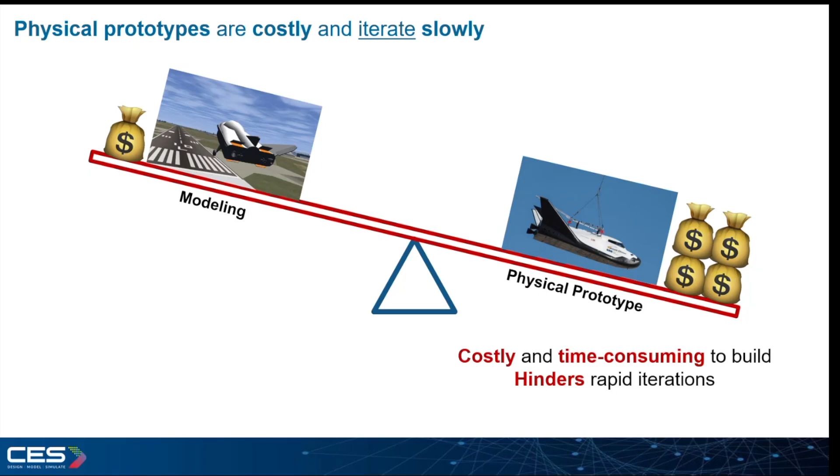Speaking about these common challenges, one I hear frequently from our customers is the reliance on physical prototypes. While physical prototypes are important in building systems and missions, they are expensive and time-consuming to build. As a result, teams often have limited time to evaluate design alternatives and iterate quickly over different scenarios and conditions.

By shifting the development to the left, which means modeling in this case, engineers can explore a much larger design space, evaluating alternative solutions earlier and continuously improving the design before committing to physical prototyping.

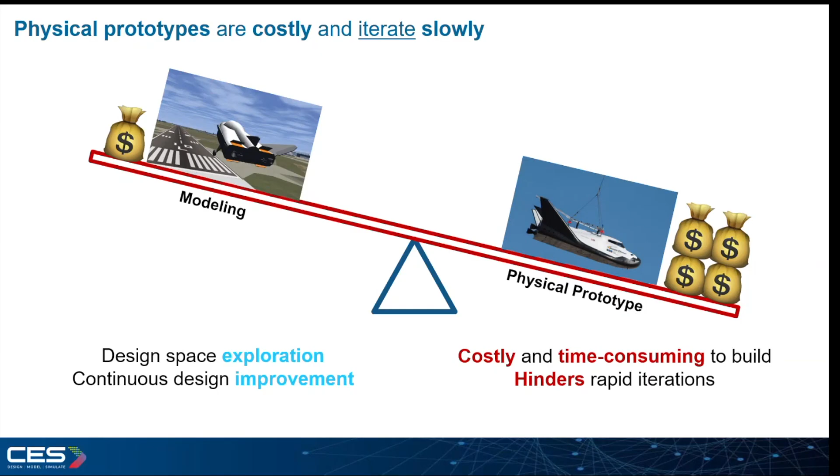Another challenge that engineering teams are facing is keeping development artifacts connected as the project progresses. A requirement influences the system architecture, which drives the design, the implementation, and the system integration. And as everybody is aware, these phases depend on each other. Every stage at least depends on the previous one.

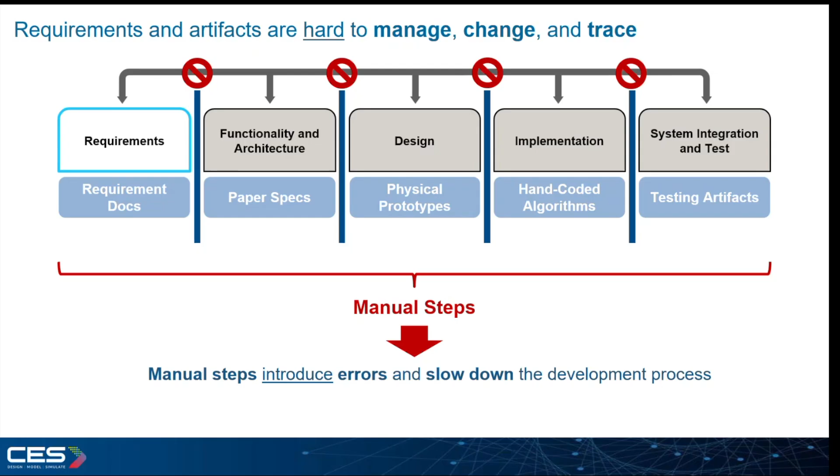In many organizations, this transition relies on handoffs and disconnected documents. As a result, changes become difficult to manage. Traceability is lost, and errors are introduced in the development process because of the manual steps involved in different phases. This challenge, related to requirements and artifacts, introduces errors and slows down the development process. This is exactly a type of challenge that model-based design can help overcome.

In this process, errors are often discovered late. As you make progress, it becomes more costly to fix issues and more time consuming. As a consequence, cost runs over the budget and the project encounters delays. These challenges can be overcome using model-based design, which starts with the requirement all the way to system integration and testing.

So the solution for us to explore today is the model-based design approach with MATLAB and Simulink. I would like to give you an introduction to model-based design before we apply it with MATLAB and Simulink to a use case, which is building a quadcopter system that's going to be our demo, just to remind you that we will have a live demo at the end of the session.

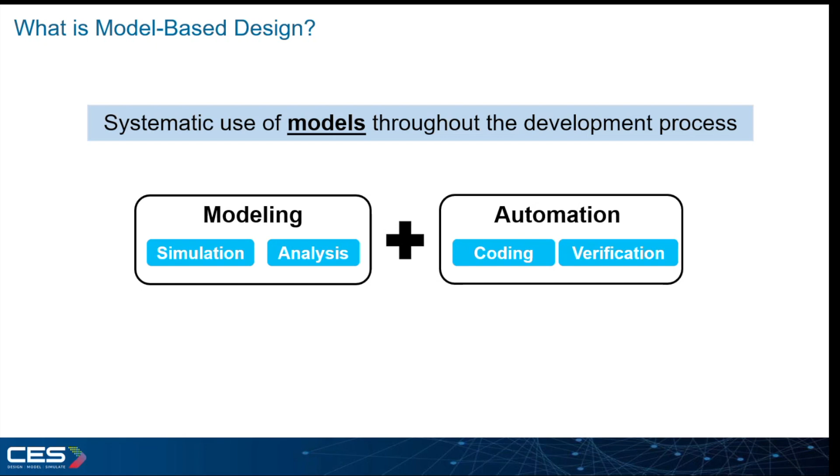We describe model-based design as the systematic use of models throughout the development process. There are two major components: modeling and automation. Modeling with simulation and analysis to try out new ideas and give you fast, repeatable testing.

So we have this question, why model-based design, that we would like to answer by the end of this section. Modeling and simulation helps cut cost and speed up design iteration, and I believe it's quite clear to everybody that modeling is not as costly as physical prototyping. By modeling, we mean the simulation and analysis. We model a system so that we can simulate and iterate over different conditions through what we call the analysis of the system.

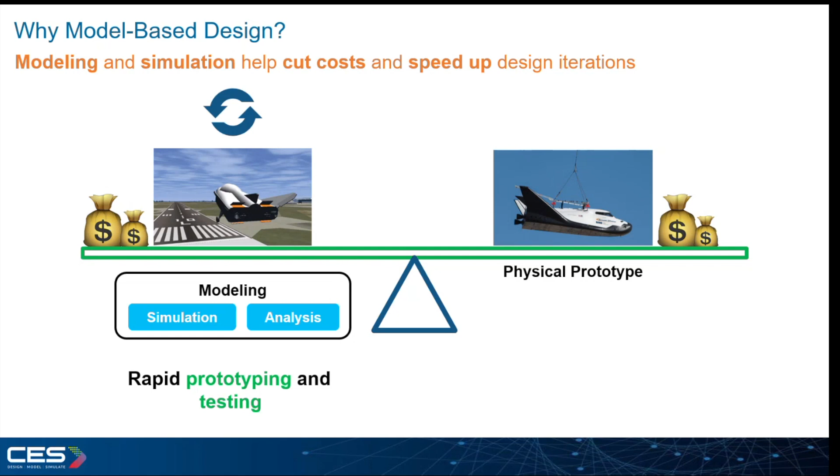Also, modeling enables iterations. So we can iterate over different scenarios, conditions, parameters, and so on. With that, we can do rapid prototyping and testing within less time and with less cost.

With model-based design, multi-domain models serve as the source of your design throughout all the phases of development, so that you can eliminate the barriers. Remember the barriers that we saw before. With model-based design, you can eliminate this, allowing you to capture requirements and link them to artifacts so that you can do traceability throughout the development process.

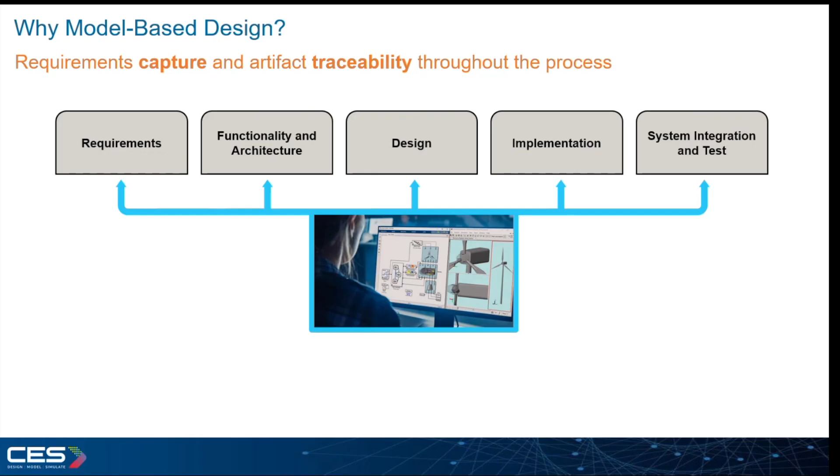And remember that model-based design is all about a model or models.

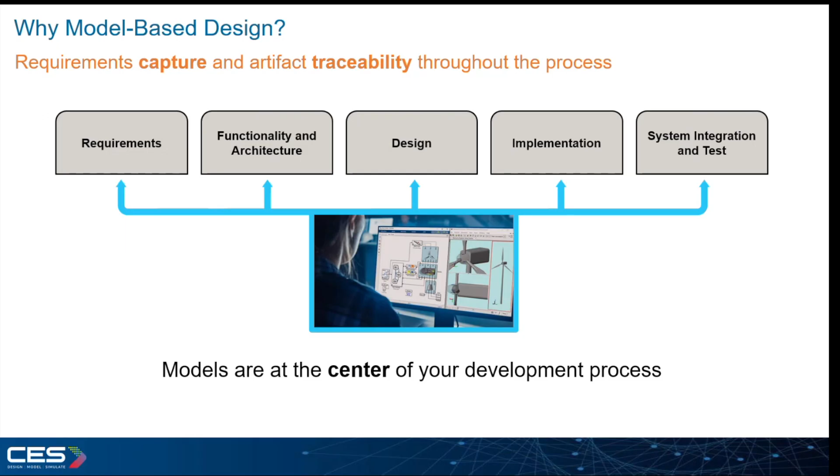Another answer to our question, why model-based design, could be automating steps in the design process. For example, coding is usually manual, and verification is disconnected. Engineers usually test at the end of the process while they do system integration.

With model-based design, you can capture requirements, specify system behavior and architecture, perform simulation, and provide a foundation for automation. You can also automatically generate code from your model for the implementation and for verification as well. So let's look at the verification here.

There are different ways to do verification. As you get your requirements in the MATLAB and Simulink environment, you can perform what we call requirement-based testing at the requirement level. We are not talking here about the architecture, design, implementation, or even system integration phase — you can analyze and verify your requirements early.

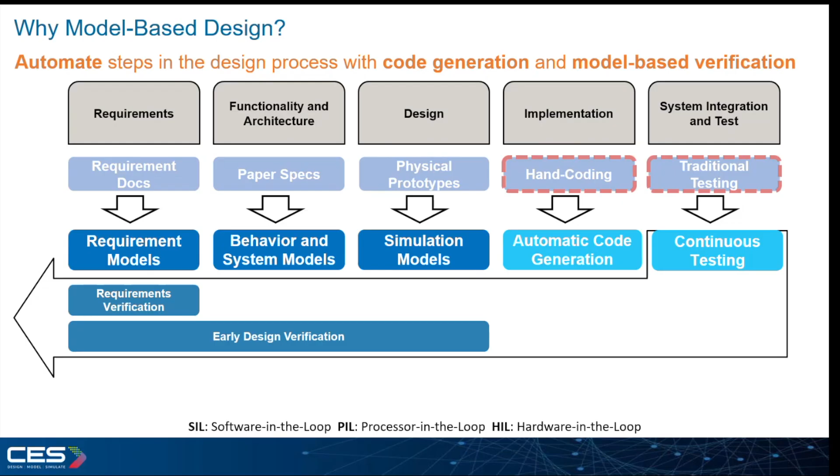Then, as you progress with building the behavior of the design or your system, you can perform early design verification. Some people like to call it model in the loop.

Virtual integration and testing is based on code generation. You first generate code, and then you can run it on your target hardware, or on a kind of hardware that will help you verify your system design.

We have three different ways to do that: software in the loop, processor in the loop, and hardware in the loop. The last verification step could be physical system testing, where you deploy your code to your target hardware, integrate that processor or FPGA into the bigger system, and start doing physical testing on your system.

With that, you eliminate any errors, and you can also save time, because this automatic code generation and automated testing will help you cut not only the cost but the development time as well.

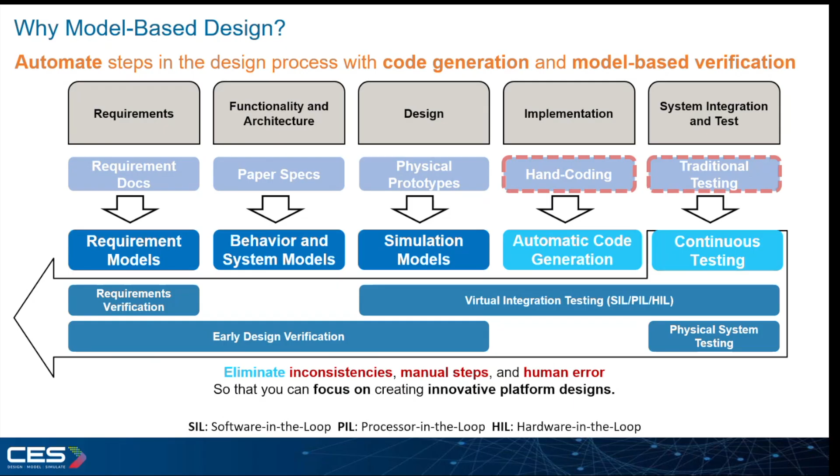The purpose of this is to focus on creating innovative platform designs, and that includes not only the design of the plants, but also the algorithms. Usually people are more focused on improving these algorithms, and that's one way to focus on the algorithms and the design of your platform throughout the model-based design approach.

Summary: modeling and simulation enables short and quick iteration cycles, saves time and costs, and ensures the delivery of products with minimal defects and, of course, high quality deliverables.

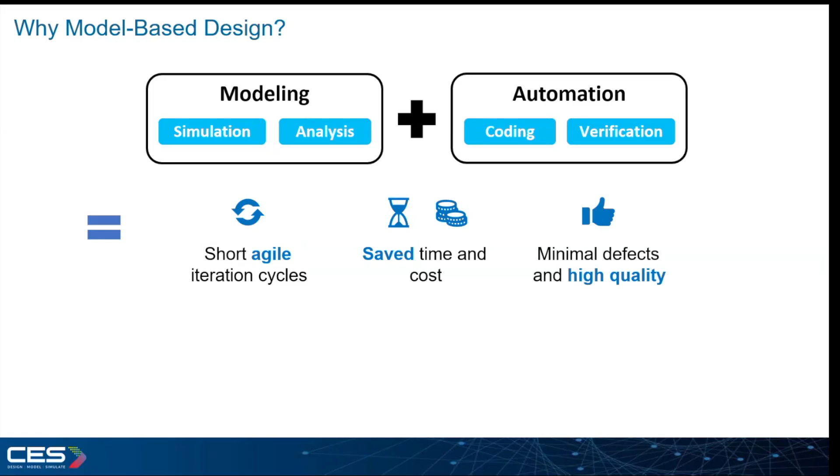At this point, we can now answer the question, why model-based design? I would say the answer is now very clear: it's to accelerate mission-critical platform development through connected digital models, early simulation, continuous testing and validation, and of course, bringing teams together to work on the projects using such an approach.

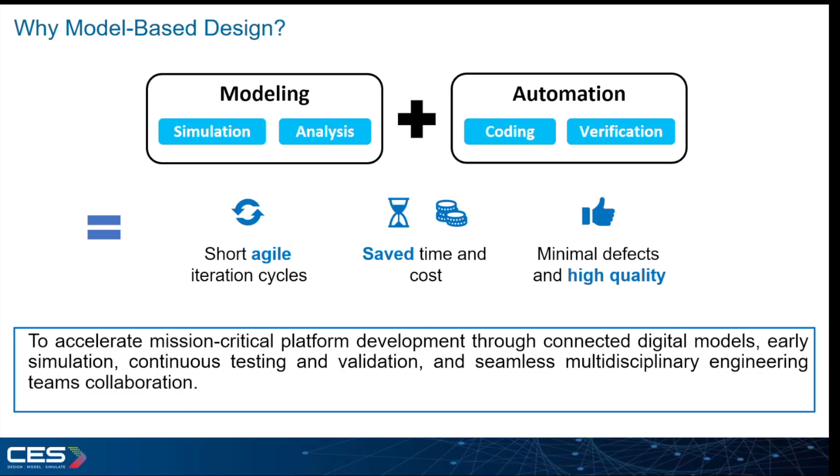So maybe now you have a question: should you apply model-based design as it is, or is it fine to go with a piece of it instead of going with the entire workflow? The answer is, model-based design is not all or nothing. We have what we call the model-based design adoption grid for that.

We help our customers in the region understand where they are now and where they want to move. Usually most people start with modeling their design algorithms when they get started. Then some of them move to verification, to simulation verification of their systems, and many of them are generating code from the model so they can perform rapid prototyping and embedded code generation.

Once this grid matures enough, you can do both of these steps. You can do modeling and simulation, or you can go from the left to the right and perform code generation. With that, you can start performing hardware-in-the-loop simulation, real-time testing, so you understand how the system performs when running on a specific target. You can also perform software-in-the-loop and processor-in-the-loop as another verification layer before you move to the certification of your products.

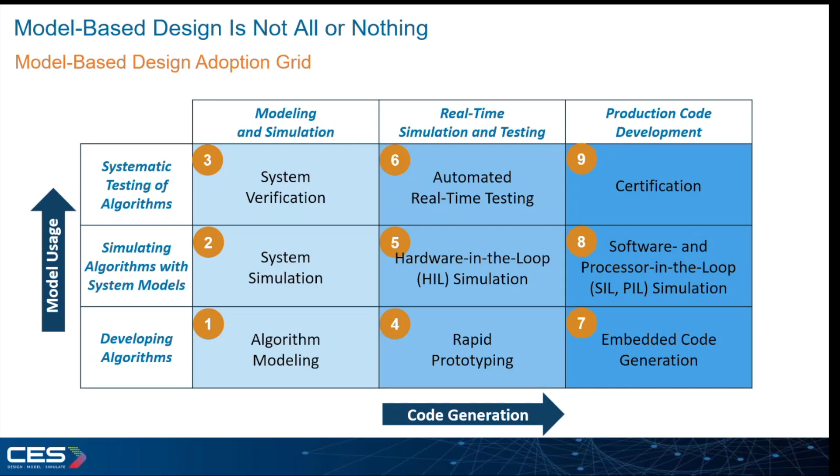Broadly speaking, as I stated before, model-based design can be described as the systematic use of models throughout the development process. I want you to remember this flow chart: we start with the requirement, then functionality and architecture, design, implementation, and finally system integration and test. This is not a one-directional approach, but an iterative approach.

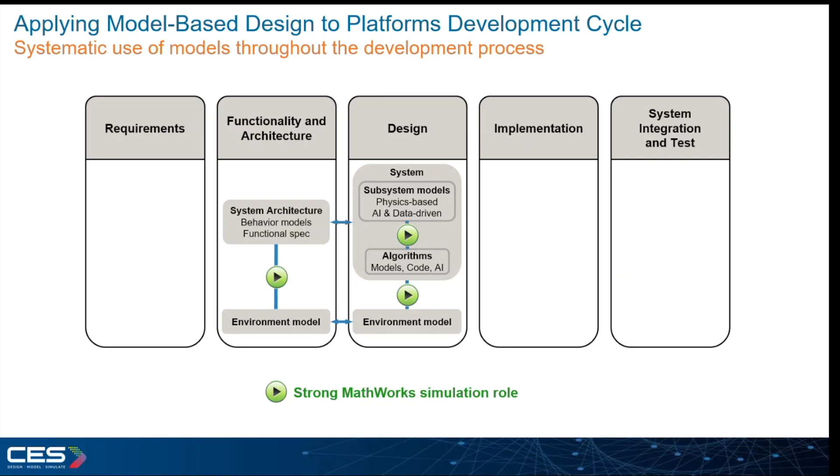So the design comes with the architecture usually, and the system architecture describes the behavior model or can be a functional architecture based on the requirements. And MathWorks tools can help heavily with these two phases, and it has a strong simulation role.

In order for modeling and simulation to be effective, you need to be able to combine components and systems from multiple domains together. So these systems can be continuous time models, discrete time models, physical models, and so on and so forth. MATLAB and Simulink can help you with modeling these components and bring them together to build the system level simulation. For example, by modeling and simulating components that run either continuously, discretely, or even event-based systems.

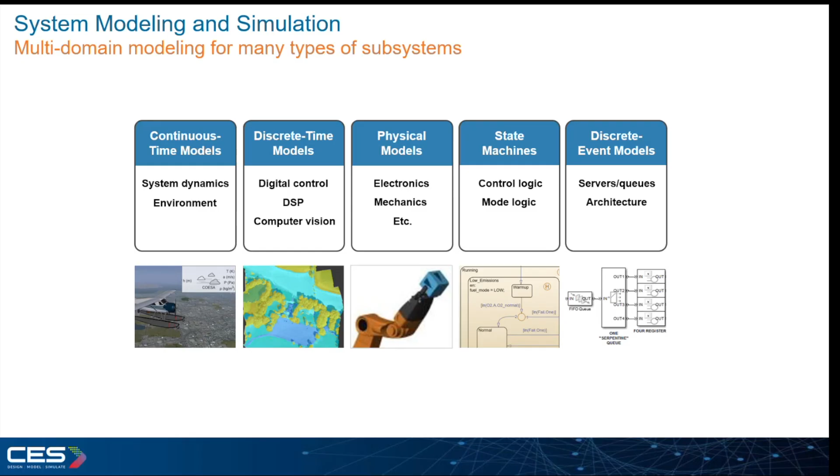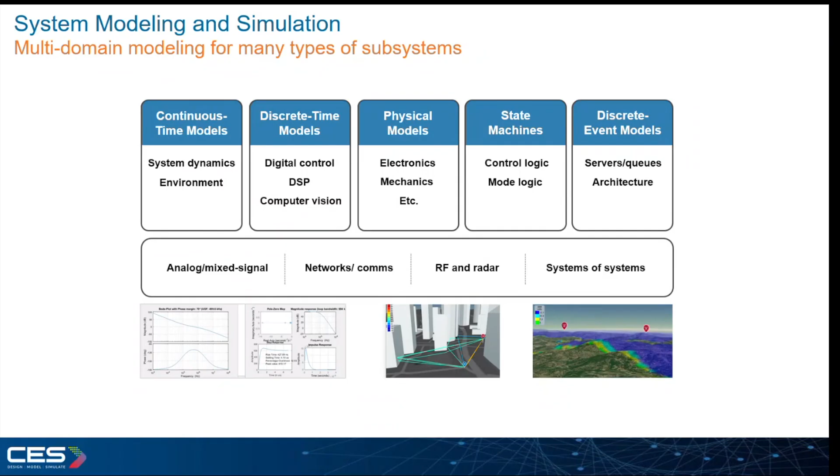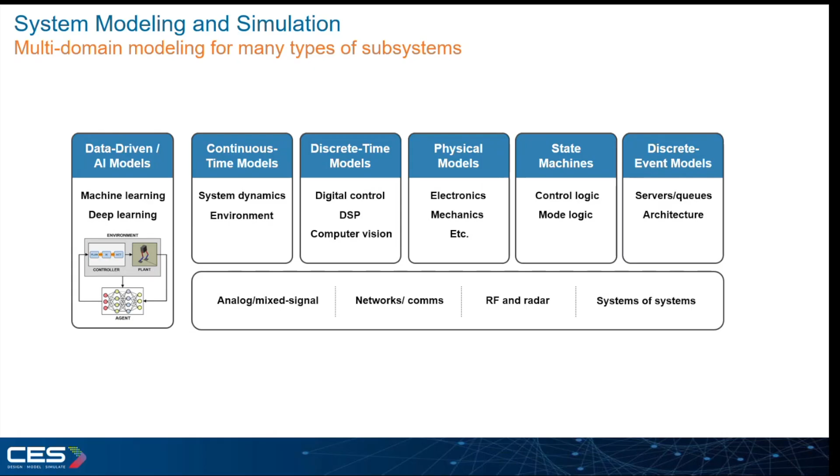And commonly we use them for system identification if we don't know the equations of that specific component which makes our system. So we can use AI, or what we call data-driven techniques, to build a component that will then be integrated into the system level simulation. And of course, you can create and integrate perception in autonomous systems. This is mainly related to the algorithmic part of the design. All of this can be done within MATLAB and Simulink.

So when we say MATLAB and Simulink, we don't mean two different platforms. It's a unified environment, and these two tools work together to help you with building such system of systems or even mission simulations.

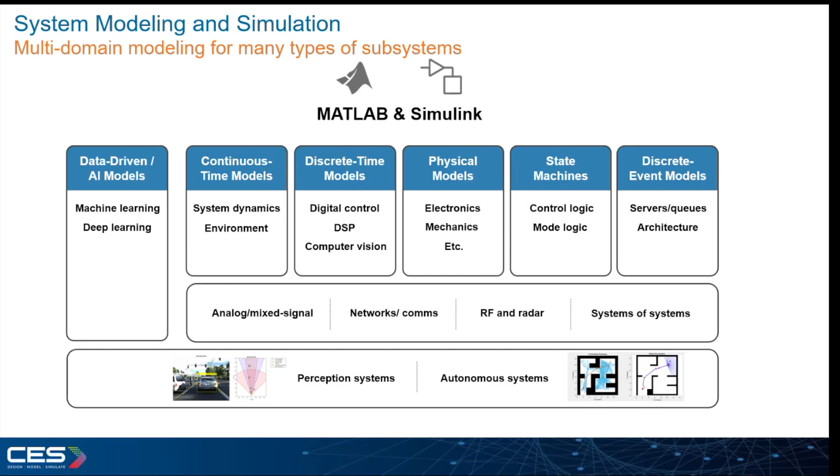These tools and languages can be integrated with MATLAB and Simulink in a number of different ways. And the reason why we want to integrate sometimes with external tools or third-party software and hardware is to get whatever we have created before. So say that you have C++ code that you created before, legacy code that you want to get into your Simulink environment. That's something called code integration. You bring it to MATLAB and Simulink, you integrate it into your simulation, you perform simulation, and later on you can even generate the code.

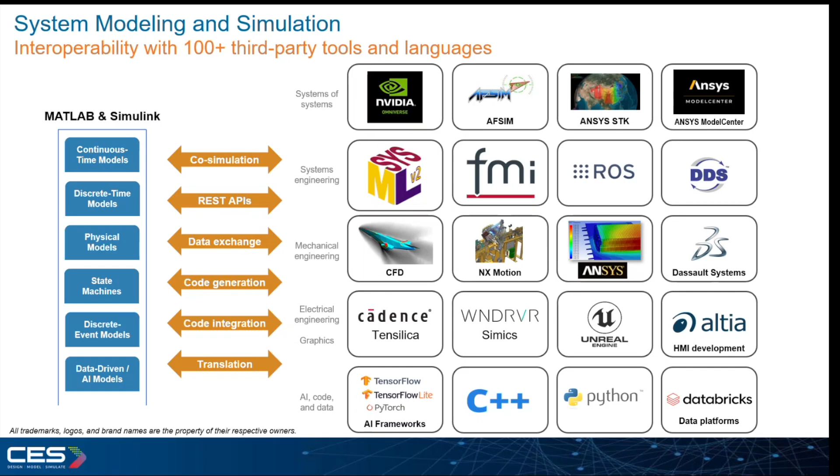So there are different ways to integrate Simulink with other third-party software and hardware. Specifically here we are talking about software, but we also integrate with different hardware seamlessly. So these ways can be co-simulation, data exchange, code generation, and so on and so forth.

Going back to our view of the system development lifecycle, this connection and integration of different types of models from an ecosystem of tools and languages that describe both the system functionality and architecture and the subsystem design form the first thread of the digital thread, where you can trace development of your system from one phase to the other. So again, the digital thread or the model is at the center of this approach, which is model-based design. This digital thread can be further extended to capture system requirements by importing or even authoring your requirements within MATLAB and Simulink.

So you have at the beginning some line of business requirements, a stakeholder coming to you with some requirements and needs. So with the MathWorks tools for requirements, you can import those requirements from an external tool, or you can use Requirements Toolbox to build your requirements within the MATLAB and Simulink environment. And in that case, it will be much easier for you to link and perform different testing based on those requirements.

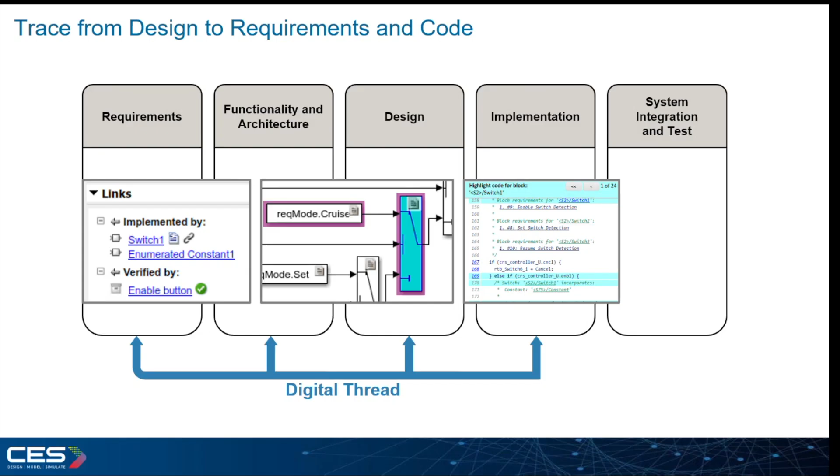And then, as I said, you can always trace your code back to the previous phases: the design, the architecture, and the requirements. So you generate code, and you would like to understand it, verify it. So one way is to trace it back to the design, then to the requirements. In that case, you might want to do some requirement changes, and it will be much easier with this model-based design approach to trace back to those requirements and see the changes reflected in the subsequent phases.

The testing, or the V&V and testing, is a very important aspect, and it's very well supported by MathWorks tools. There are other tools that can do testing, verification, and validation. But the good thing about this environment is that you can do these things automatically, or what we call automated testing, verification, and validation.

So, as I said before in one of the slides, you can perform testing, verification, and validation in different ways, starting with requirements validation, early design verification, virtual integration testing through what we call SIL, PIL, and hardware in the loop. And eventually you would like to test with your physical system, and that's called physical system testing.

Now, we would like to understand how AI can help with building a better platform and accelerating the development. Let me bring back this model-based design chart and speak about the integration of AI in model-based design. AI can solve tasks that are difficult to solve with conventional or traditional algorithms. For example, you can use AI to model specific components, as I stated before. Or you can use AI as an alternative to some algorithms.

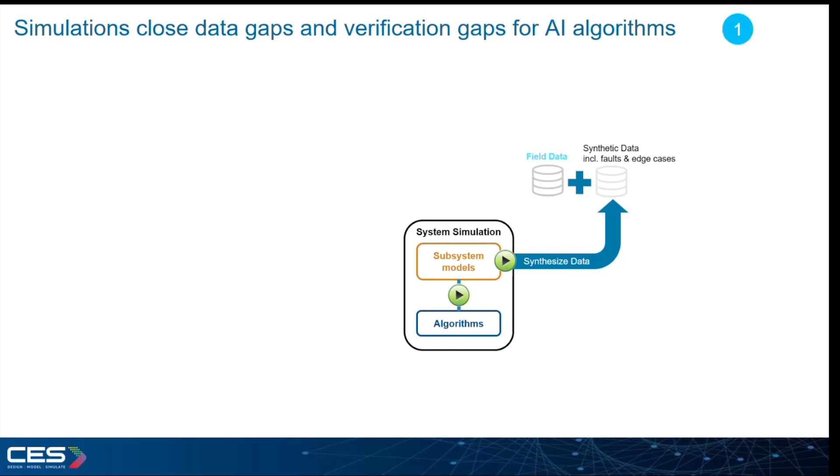Let's now look at how we can integrate AI into the model-based design. First of all, developing AI models requires a lot of high-quality training data. So with simulation models, you can generate synthetic data to add some fidelity to your real-world data or to improve your real-world data. AI models become more accurate when you train them with datasets that cover a range of operating conditions and scenarios, including specific cases that are very difficult to cover with real-world data.

So with that synthetic data, we can refine our model, improve it, and then verify the accuracy of the training. And this is like a loop, okay? So you can keep iterating over the training phase of your AI model until you get an accurate AI model.

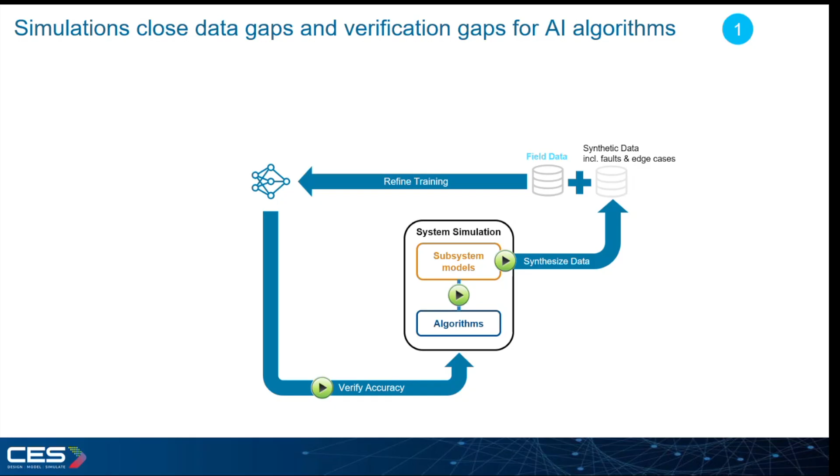These models, you don't need to build them from scratch. If you have something that you have built already, you can bring it to the MATLAB and Simulink environment. So say you have a pre-trained model. With the integration aspects in mind, we can bring these pre-trained models to MATLAB and Simulink and integrate them into the system-level simulation.

The same applies for common frameworks used by AI engineers, or machine learning and deep learning specialists. They use PyTorch and TensorFlow. So with the integration support packages provided by MathWorks, you can import from these frameworks to MATLAB and Simulink.

Or the other way, which is training an advanced model from scratch with MATLAB and Simulink, and we have some very powerful capabilities included under Deep Learning Toolbox and Statistics and Machine Learning Toolbox that help you with building AI models and seamlessly integrating them into your training loop.

There are two main ways of integrating AI. So I mentioned that we can use them for the platform design, or we can use them as part of the algorithmic aspects. So with that in mind, we would like to understand further how they can be integrated.

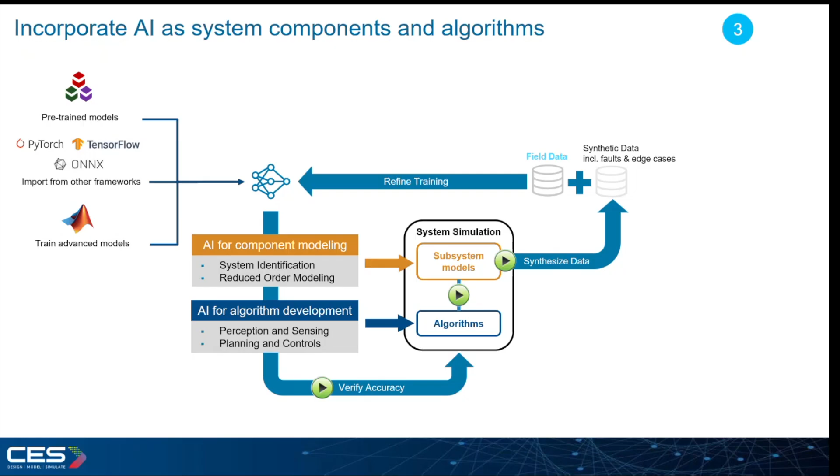So first, AI can be applied to component modeling. In such case, two use cases are very common: system identification and reduced order modeling. AI can also be applied to algorithm development, so you can add advanced perception and sensing capabilities to your algorithms, or you can also use that as a controller or as an algorithm for planning. So with that, you enhance traditional techniques with the integration of AI capabilities into your system design and into the algorithm development.

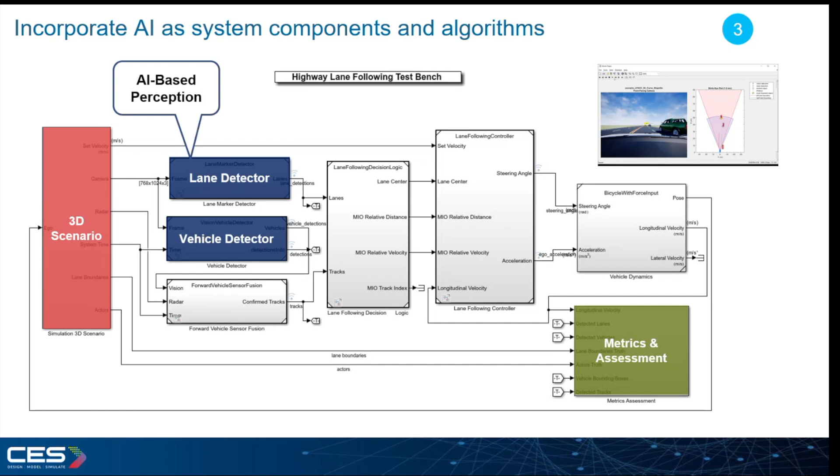This is a good example that shows how to use AI with model-based design within Simulink. So AI can be applied to solve the perception problem, can be used to create virtual sensors like sensor fusion. AI can play a crucial role in modeling system dynamics. And of course, we can build AI-based controllers.

So instead of using a basic, or let's say a controller that is not very accurate, we can train some deep learning model or even just a machine learning model, and we replace our controller with that AI-powered controller. Of course, you can use AI as an alternative to decision logic.

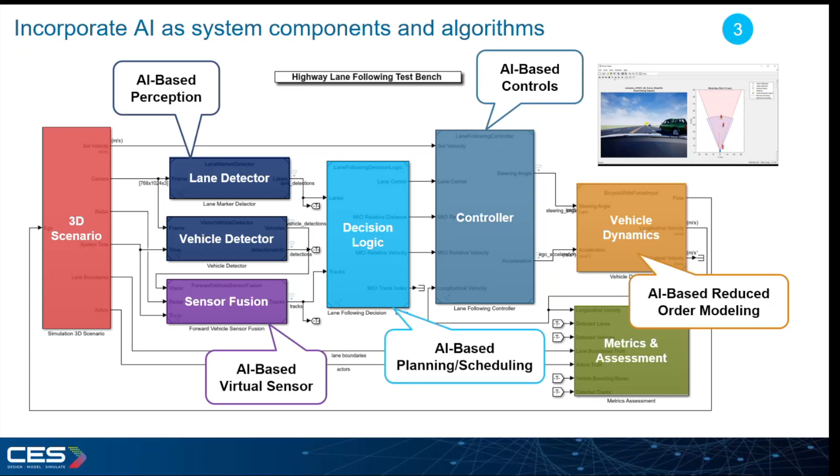And this is the simulation of that example. This is the visualization of the scenario. You can look at this as a mission where we are trying to detect and classify different targets using different data from different sensors, from radar, camera, and so on and so forth. And all that is based on AI capabilities.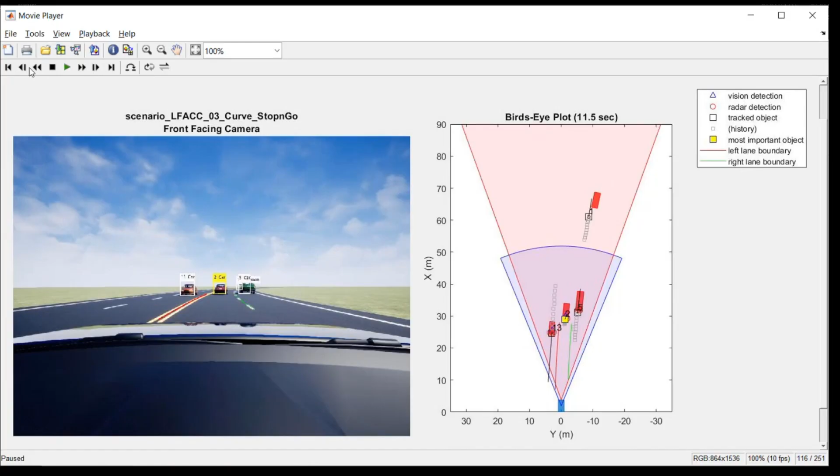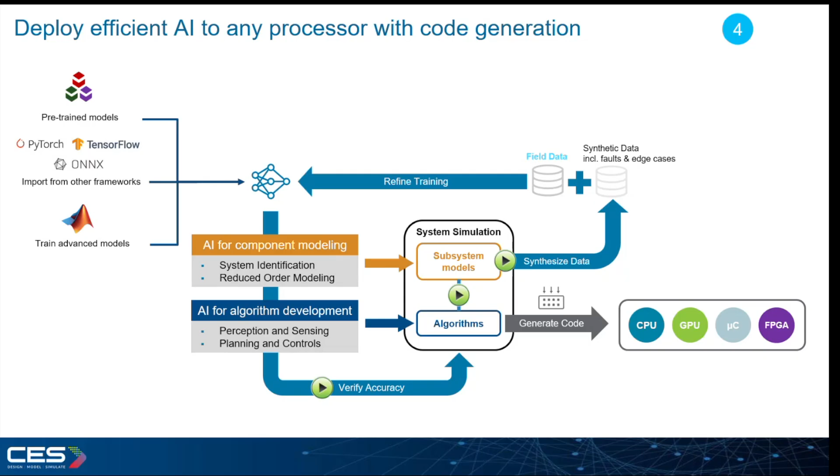And of course, the story doesn't end here. So you would like to take your AI models to production. And the same thing we said about automatic code generation for classical algorithms can be said about deploying deep learning and machine learning algorithms. You can generate code for CPU. With that, you need to generate C, C++, or for a GPU that's CUDA code, or for a microcontroller it's usually C or C++. And you can also target an FPGA by generating HDL code.

There is one step here that you need to keep in mind, which is model compression, which is well supported by MATLAB and Simulink functionalities. So you don't want to just take your model as it is and deploy it on your hardware. You would like to optimize it and make sure that it's going to run in real time. And that step or that phase is called model compression.

And the way you can do that is through the structural techniques. There are many techniques out there to compress the model, or just by changing the data type. In that case, you are reducing the memory usage and so on and so forth. And with that, you are compressing your model. So the next step for you after you compress your model is to generate code and deploy it to your preferred hardware.

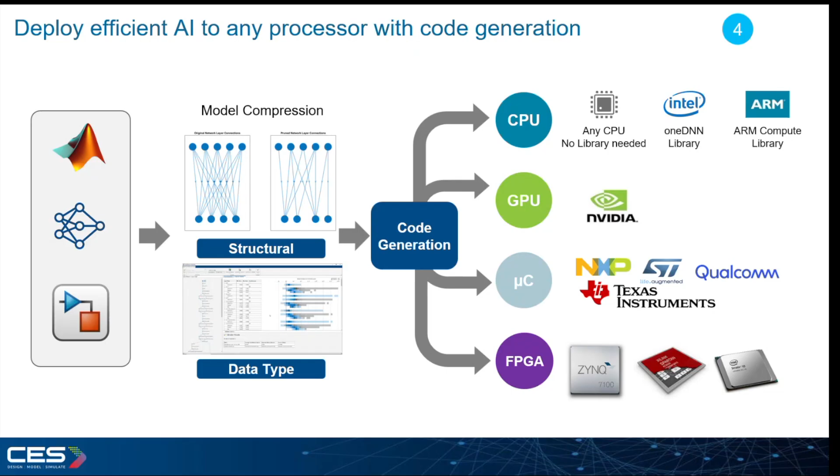So now we have been speaking about how to use AI as part of the platform and the algorithmic aspects. We would like now to use AI to assist us with accelerating the development of our platforms. I want to start with just a quick overview of how it started with generative AI. So in the very beginning, we started with traditional chat. We ask an AI agent some question, it gives us an answer, and then we copy paste.

And then after some time, we saw generative AI and tools evolving to writing code, running it, and debugging it. And currently, we are not only talking about that, but we are talking about agentic AI, trying to do the entire development process, from writing code to running it, to fixing it, to testing it, and so on and so forth.

If you want to know how AI agents work, they perceive, then they do some thinking, reasoning, and so on and so forth. And the next step for them is to act, and then there is another step after that, which is learning from the output of their answers.

At MathWorks, or with MATLAB and Simulink, the focus is not only about integrating the generative AI, but to get something which is verifiable or verified. So combining MATLAB and Simulink with generative AI has two types of workflow: technical computing if you are using MATLAB, or model-based design, that's more Simulink.

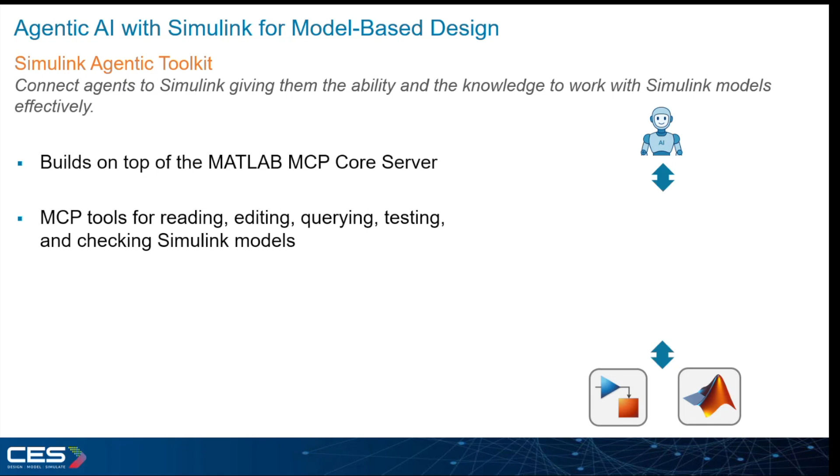So in link with model-based design, I would like to speak about one way to integrate generative AI with Simulink environments. The tool for that is called Simulink Agentic Toolkit, which allows you to connect agents to Simulink, giving them the ability and the knowledge to work with Simulink models effectively. The way we connect it is built on top of MCP. So the MCP tools for reading, editing, querying, testing, and checking Simulink models. And the agent skills are encoding, in this case, the model-based design best practices.

So this is the toolkit, and as you can see here, we have something called Simulink skills, and that skill file has the best practices of using model-based design. And the purpose, remember that we would like to get something verified at the end. So we would like to get something that was designed keeping in mind the best practices of using Simulink with model-based design. So the solution is provided within the Simulink Agentic Toolkit, and it's enabled by what we call Simulink skills.

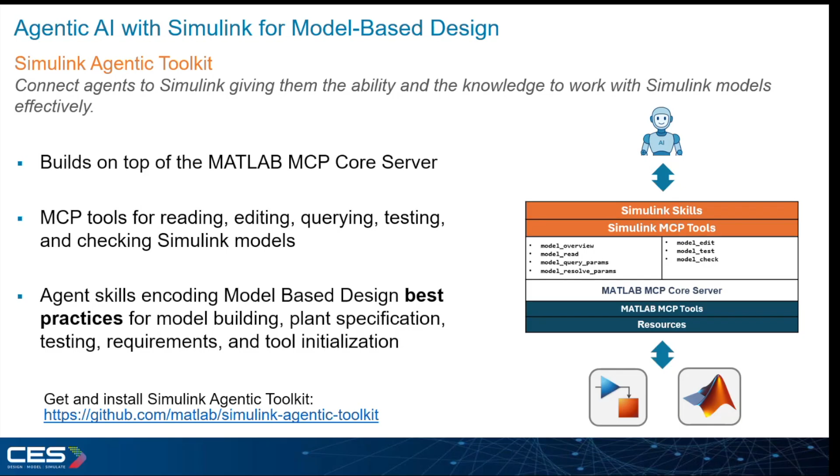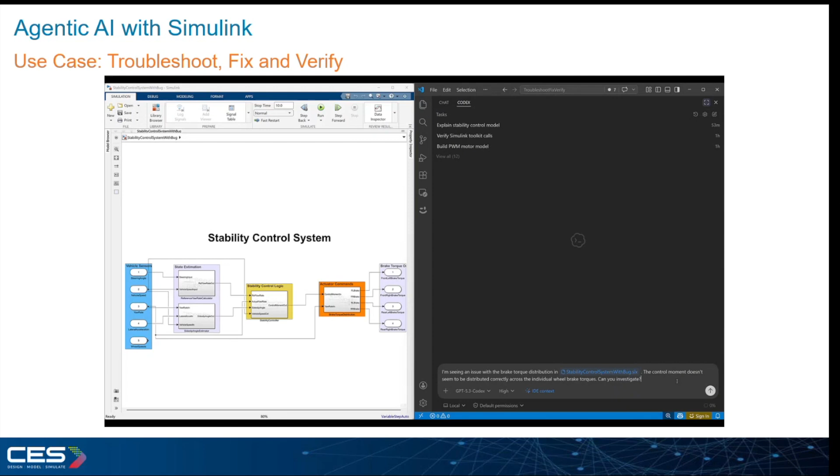This is one use case. We will ask an agent, which is in this case OpenAI Codex, to troubleshoot, fix, and verify a stability control system. So first, we will ask it to investigate the design and find the issue. Okay.

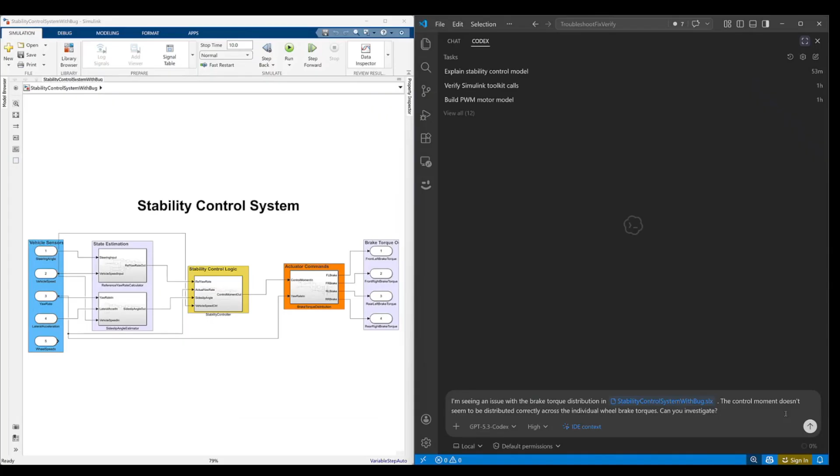So the thing that we should all be aware of is the quality of the prompt that we send to the AI agent. So you have to write a good prompt, and then the agent will do the rest of the work for you. So it's now looking for the issue.

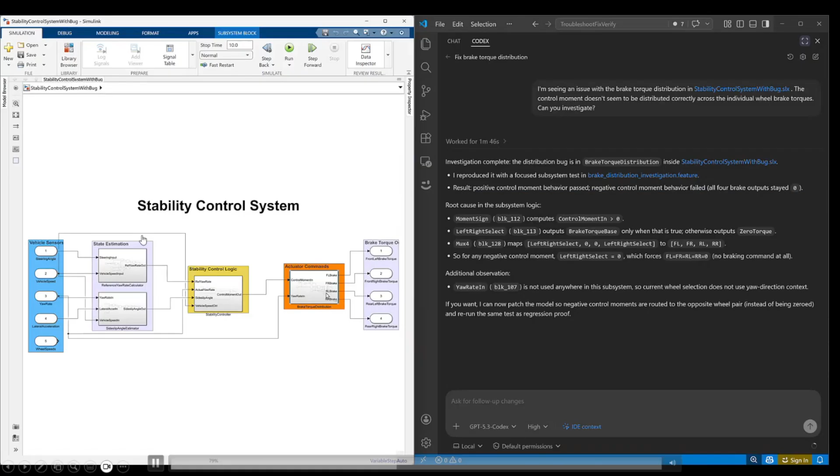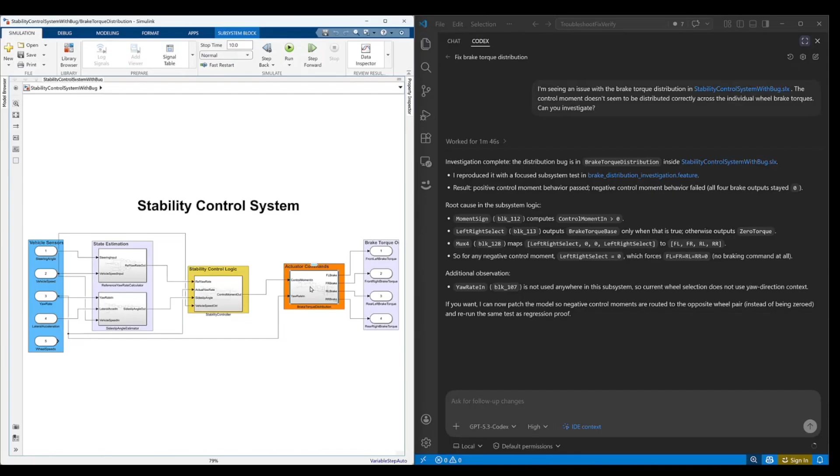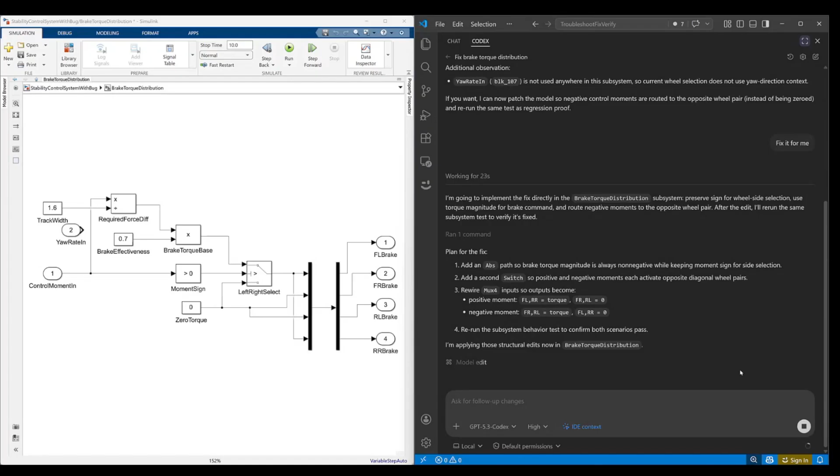And then we can open the subsystem where the issue is located. Okay. Next, we can ask it to fix the issue. Fix it for me. So it's going to fix it for us by implementing maybe a different block, or maybe just playing with parameters. So it's up to the AI agent to fix the issue in this case.

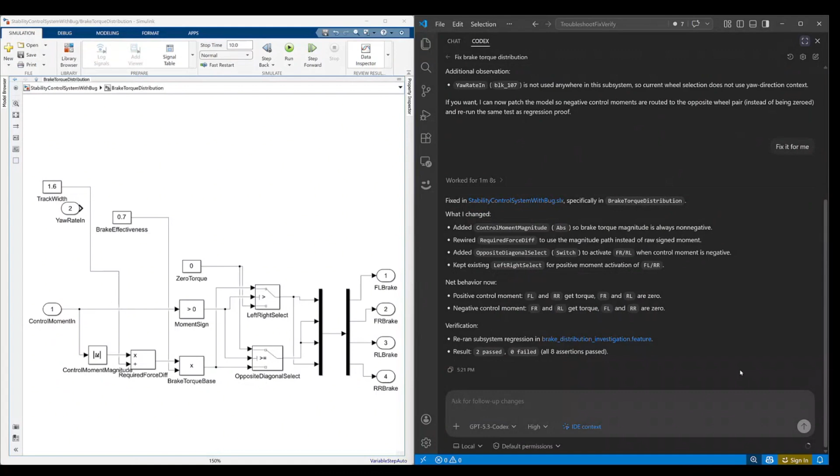So it's now fixing it, editing it, reading it, and testing it. Remember that the agentic AI workflow doesn't only fix issues, but tests the model after fixing those issues. Okay. This is one use case.

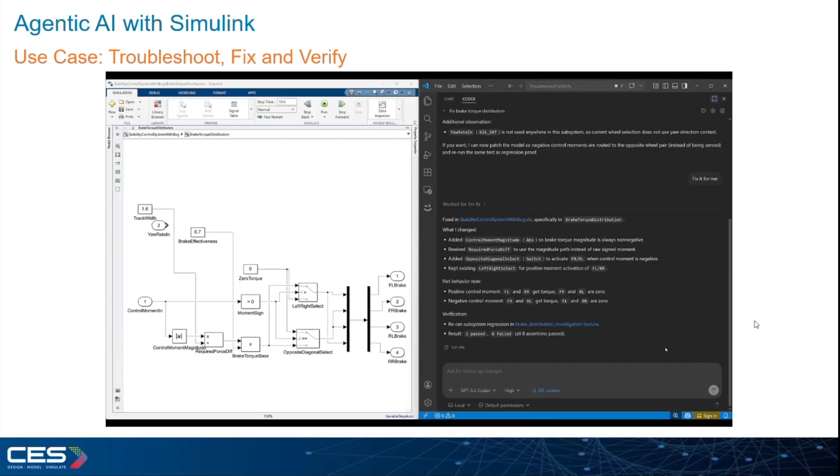So next, we would like to move to the demonstration. So the demo, or the live demo, is about designing and testing a quadcopter system. Not only the platform, but we will try to map this project to the model-based design approach, from requirements all the way to the system integration, virtual testing, and virtual integration and testing. So that's actually the live demo.

Let me just walk you through the workflow again, and I'm bringing back the development process flow chart. We start with requirements and functionality and architecture, design and simulation, implementation, and then system integration and tests. That's exactly what we have been talking about since, I believe, the start of this session. And we would like to apply it to this use case, which is a quadcopter system design and testing.

I will jump now to MATLAB. Okay. And this is my project. So saying that we would like to validate quadcopter systems and system architecture with simulation. We're gonna start with defining requirements, build the architecture, then iterate over that architecture so that we include the security requirements. That's something we'll not include in the beginning.

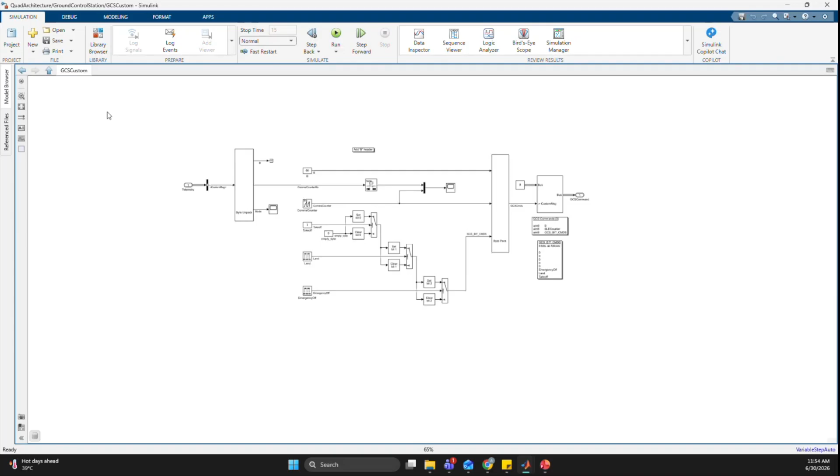Then the next step for us is to model the design itself. So we have four main components of this system: the ground station, the threats, then the quadcopter plant alongside the controller, and of course we have a visualization component just to show the scenario.

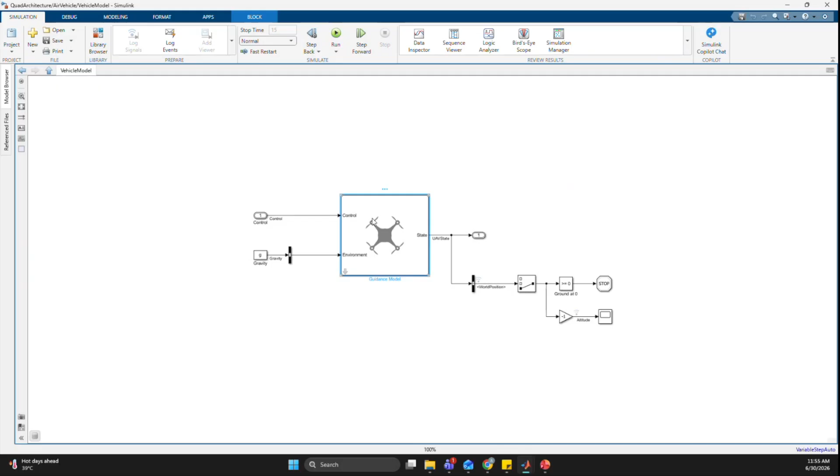Let me go now to the vehicle and show you the platform for our quadcopter. It's actually modeled using a guidance model, and you have the choice. So if you want to go with a higher fidelity or a lower fidelity, MATLAB and Simulink add-ons for modeling UAVs offer you plenty of options for that. We are using this guidance model for this example.

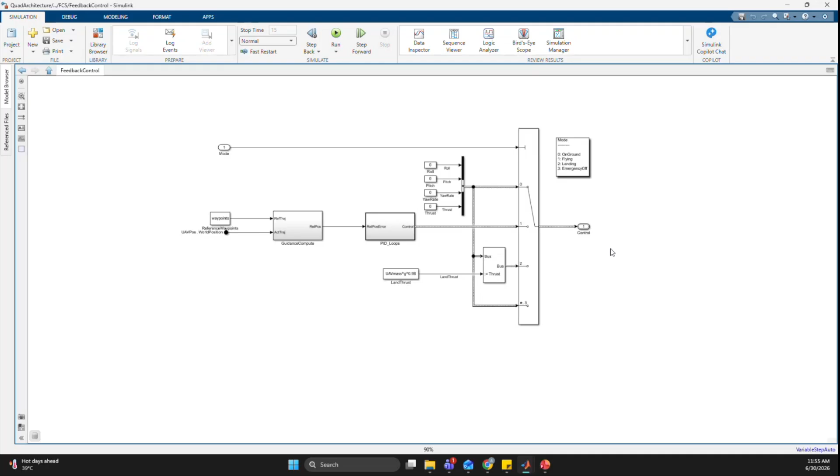The flight controller is implemented here, so you can decompose the components into smaller components and integrate your controller. So we have a guidance compute block or subsystem, and then for the controller is just a PID, okay? And we're doing some calculation after so that we get the control signal. The output of this will be visualized, and the output is the state of our UAV platform.

All right, so next we would like to link those requirements. So the requirements can be linked to different components. Let me go to requirement manager. This requirement can be visualized and then linked to different components.

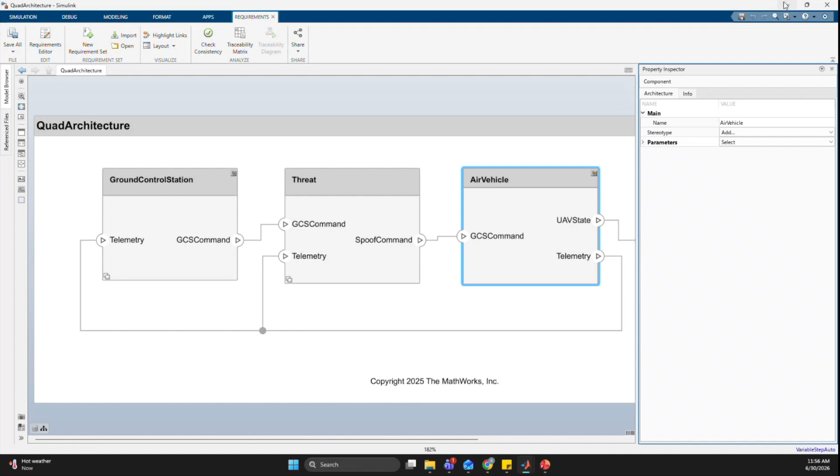Where are they saved? So they are saved in a separate file, system requirements. I'll open that file and show you. So it's actually the same as I showed you before.

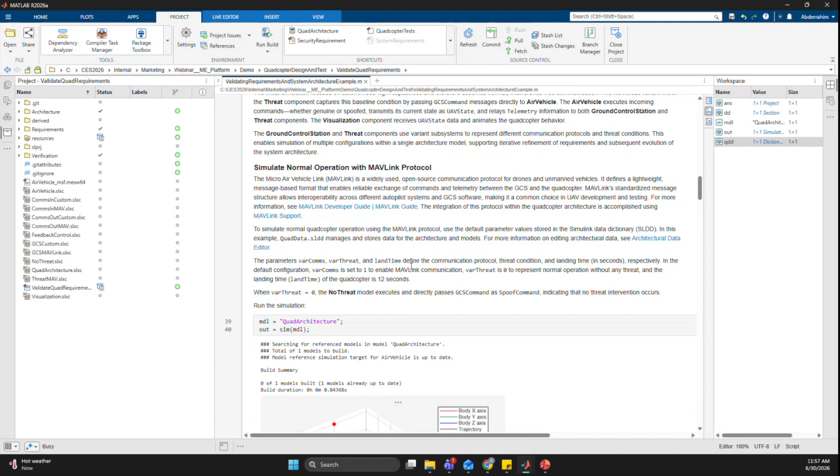So next is to implement the behavior. We spoke about that already. And we have two scenarios. With a normal operation using a Mavlink protocol, we get this performance. And then with another scenario where it's needed to build a custom protocol, a Mavlink protocol. This Mavlink is heavily used in drones design for communicating between the ground station and the UAV. But it's simple and easy to spoof.

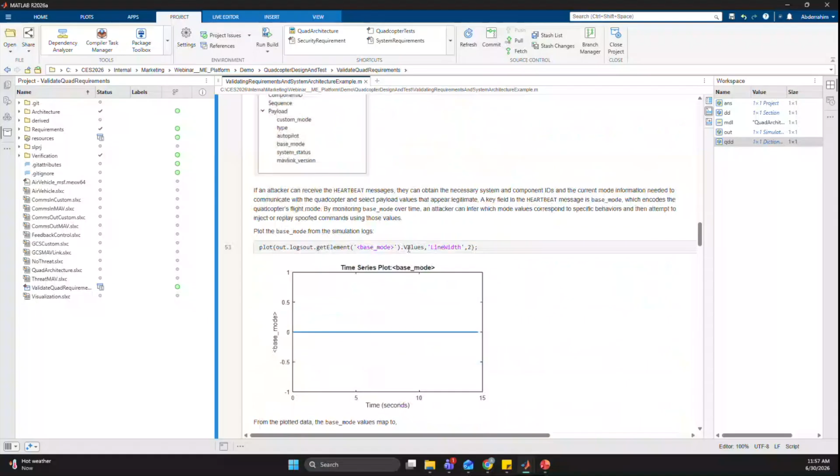So this scenario is just to verify how good are the performance of our design against those threats. To do that, we are simulating. We simulate the model using this sim, and then we also assess the risk using this matrix.

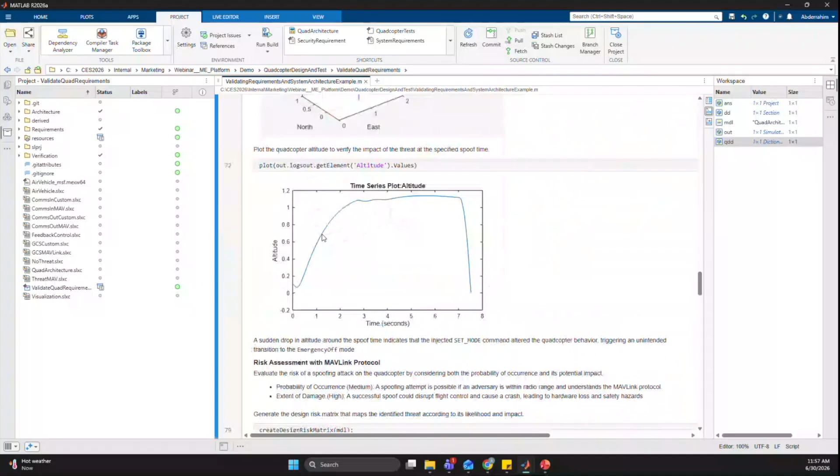As you can see with this basic Mavlink protocol, we have a high risk of being spoofed, and so what we would like to do now is to introduce some requirements so we test against them and we validate our design. So speaking about this, the security requirements are saved in this file, okay?

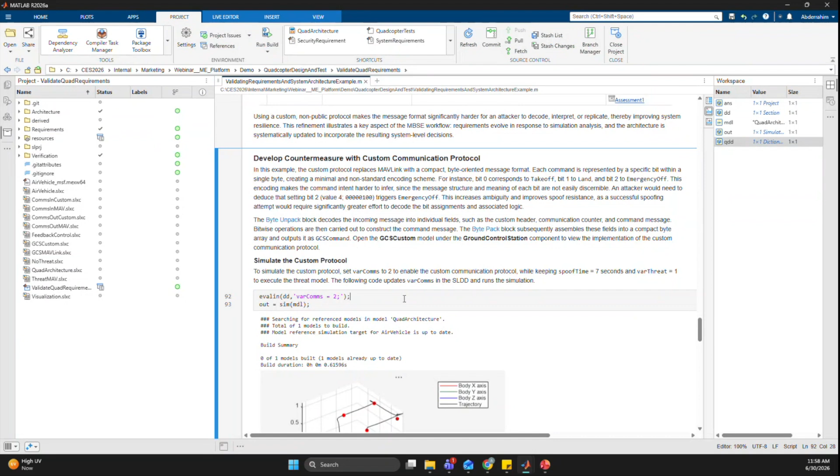And I can show you that. It's one requirement related to GCS, or to the ground station to the UAV communication. And we would like to verify our design against that. But before that, we know that our Mavlink isn't working properly and we would like to customize or build a custom one. So we build a custom one and then we simulate again the risk.

So in this case, it's moved to the yellow area. It means that there is a risk, but it's not as critical as before.

The last thing in the workflow is the automated requirement-based testing. So you can build test cases using test manager. So you can build a test case and then you specify the model under test. You specify the parameters for your iteration. You also can define the iterations and everything. And later you can run your test and see how that gonna work.

For us, we would like to check if our custom Mavlink gonna work properly or not. So we have created 3 iterations. One for the communication without spoofing, others for other iteration with the spoofing, but one with the classic Mavlink and another one with the custom communication link. So we have in this case 3 iterations.

I can probably show you the test I ran before. And as you can see, with the custom protocol, our test has passed successfully.

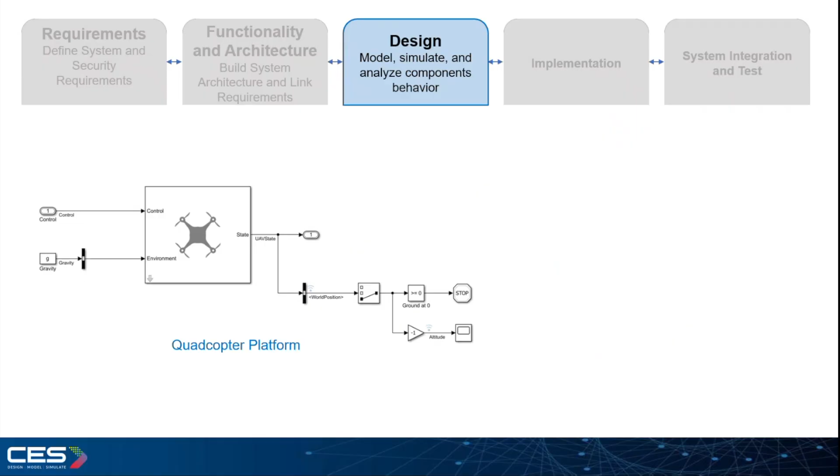So this is the workflow, and I have added everything here. We're gonna share the slides, and you can go through this at your pace. I have added all the steps or the phases and the relevant part. Just one more word about the implementation part.

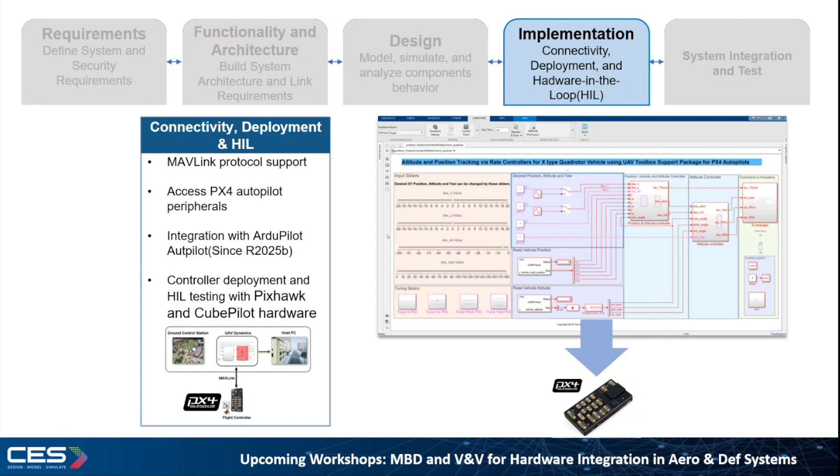We didn't cover it properly. It's just one small part, which is the Mavlink communication, but MATLAB and Simulink offer more than that. So you can connect your MATLAB and Simulink environment to a drone, flying taxi, or whatever you are building, and then perform the hardware in the loop testing, or what we call, if you want to be specific, PX4 in the loop or autopilot in the loop. It depends on the autopilot that you are using.

A summary of our demo. So we mapped model-based design to a quadcopter system design and verification. And I would like now to mention about upcoming workshops where we're going to cover more hardware implementation and system integration and testing.